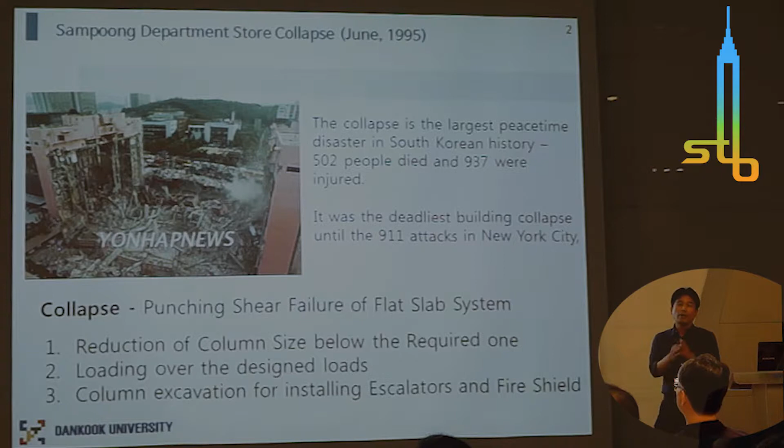The collapse cause was the punching shear failure of the flat slab system. The column size was reduced below the required one. Surprisingly, an architect, without any consult from a structural engineer, decided the reduction of the column size, the loading over the designed loads, and then column excavating for installing escalators and fire shields.

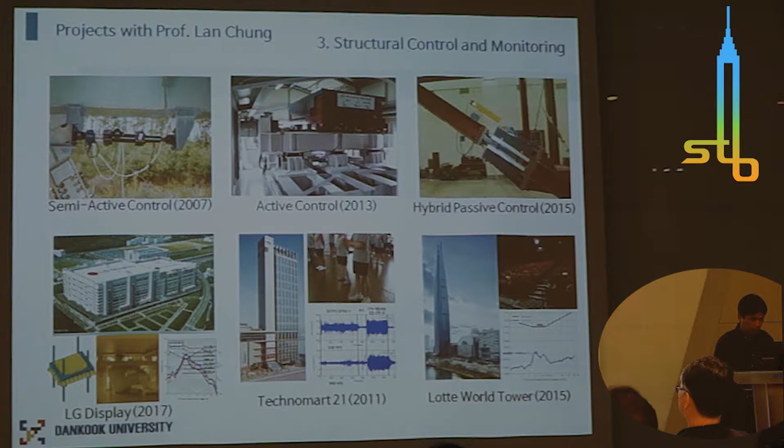First is the active control. Before we started this project, Korea was a wasteland in active control—all the products for active control were imported from Japan. We first developed this prototype of active mass damper and applied it to a 5-story steel structure. We verified the performance; the active damper can significantly reduce the structural response. We also developed control algorithms.

After the success of this prototype damper, we were looking for practical application. Who is going to use our damper? Well, who is willing to use our damper without any practical application track record?

Abnormal vibration at a 39-story building structure was occurring. Mystery shaking at an empty solid building. The 39th floor accelerometer showed vibration for about 10 minutes, with no earthquake in the area.

The building was rocking up and down, and I felt so dizzy that I almost vomited. All the residents evacuated for 3 days.

Everyone, including us, every Korean was shocked, because I think this is due to the trauma from the collapse of the Sampoong department store. A normal building may collapse even in normal time, so Korean people may have trauma about building collapse.

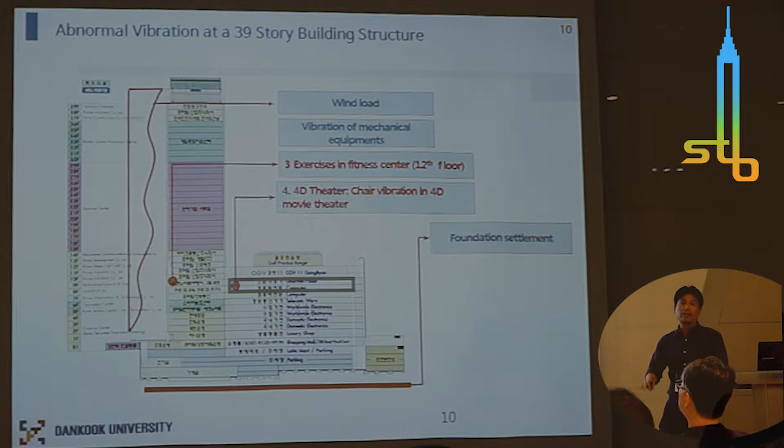But the wind speed that day was so small, and the mechanical equipment operates all day, while the vibration accident only occurred for 10 minutes. Also, the building was mounted on a rock site, so only 2 vibration sources were considered as possible sources.

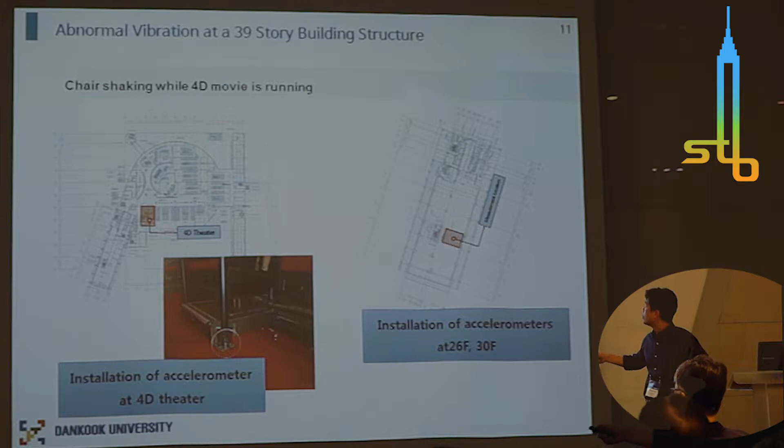The experiment was conducted on the 4D theater, where an accelerometer was installed at the office building. The vibration accident occurred at this office building.

This slide shows the movement of the 4D theater. After the start of the movie, the floor of the 4D theater vibrates significantly, but the office building does not show any response according to the 4D theater's movement, and after it stops, there is no change in the vibration.

Only human-induced vibration can be observed. This room was not occupied by humans.

We constructed an analytical model and found the vertical mode. The frequency of this vertical mode is 2.7 Hertz, which is quite small. So we could estimate that this building can be excited by human activity.

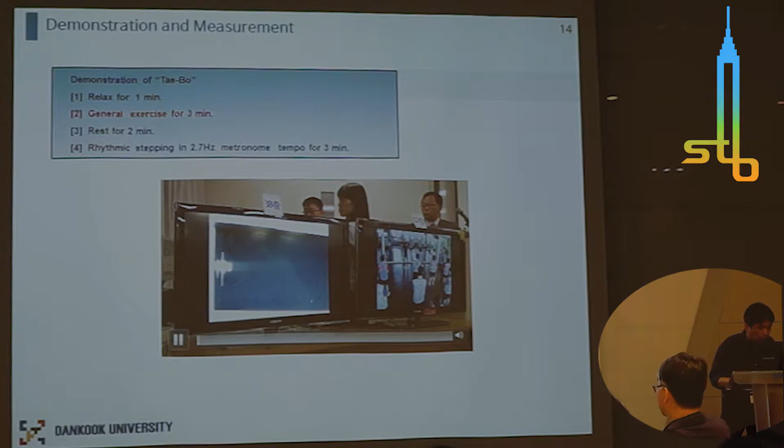I'm going to show the public rehearsal. This movement is on the 12th floor. Here is the acceleration on the 38th floor. This is the general movement.

It's called a mixture of taekwondo and aerobics. In normal time, this does not cause any vibration amplification.

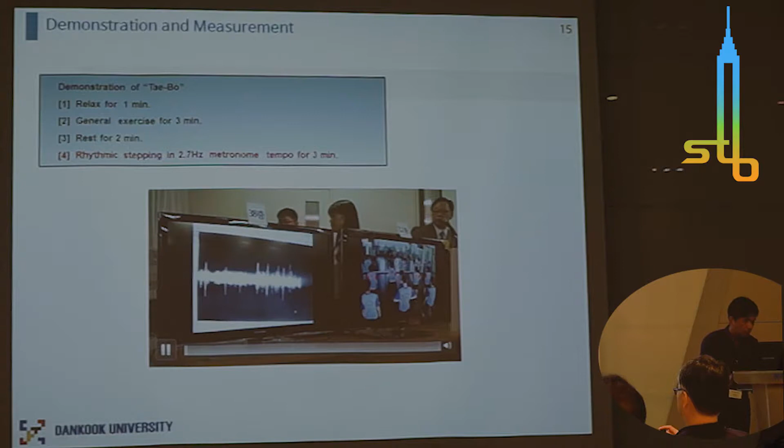However, people are stepping according to the frequency of the building structure. I think you should notice this amplification in the building structure's acceleration.

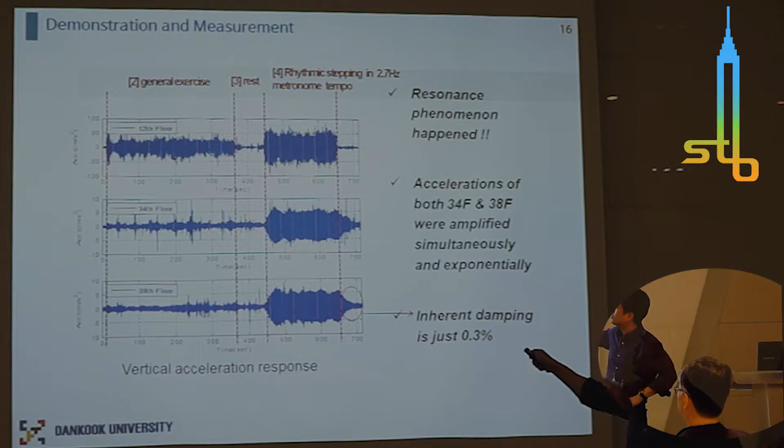We measured the inherent damping by observing the free vibration after the excitation. The inherent damping was just 0.3%, which is too small. It just consists of a steel box column, and vertical movement does not cause any friction between cladding or other elements, so the friction or damping was so small.

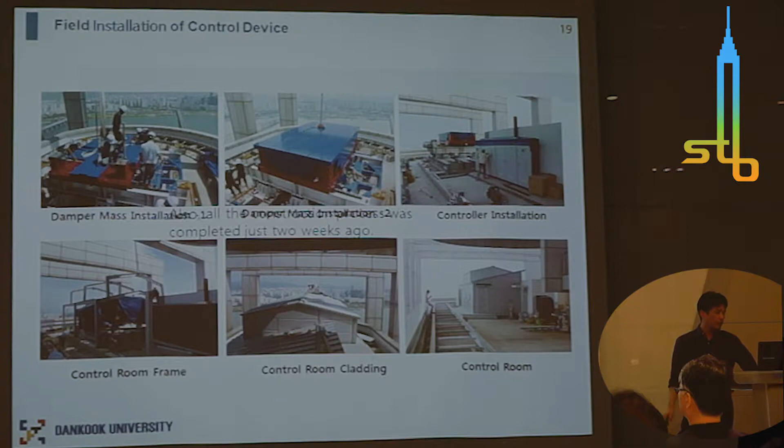We are going to develop this type of damper for controlling both vertical and horizontal directions. This is the process of the construction. The damper was successfully installed, and we conducted the experiment.

Here is the steel plate, which can prevent the movement of the TMD. By installing the steel plate, we could reproduce the resonance phenomenon. Only 10 people can excite the building in the global direction. Here, the red line is the resonance result. You can obtain the same result at that extent.

After removing the steel plate, we could see the TMD impact. You should clearly see the structural response was reduced significantly. The damping increased from 0.3% to 2.7%.

Also, we conducted a wind tunnel test. Although the vibration extent occurred in the vertical direction, the owner of the building worried that another load may excite the building.

The brand of the building was so damaged that the owner of the building could not sell it to another person. He wanted the building to have no vibration extent in any manner.

So we conducted a wind tunnel test. By conducting the wind tunnel test, we found the building is not so vulnerable to wind load.

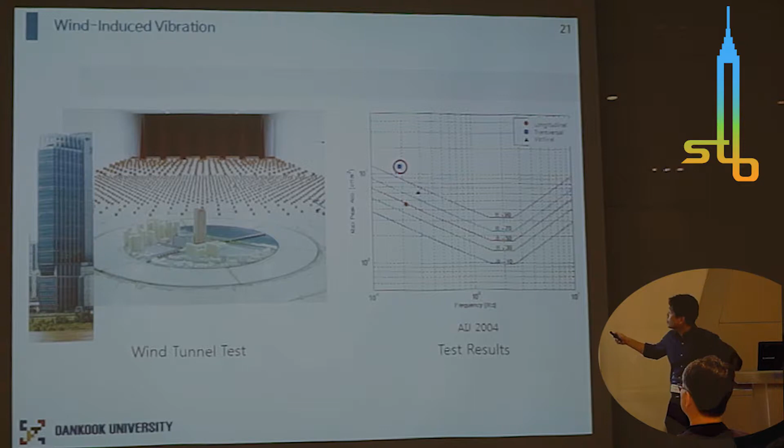Also, there is another limitation: the installation space was so small, and the stroke was very small. Small mass, small stroke is a very hard condition for me. So we developed a stroke minimization control algorithm. Here is the algorithm - we could minimize the stroke.

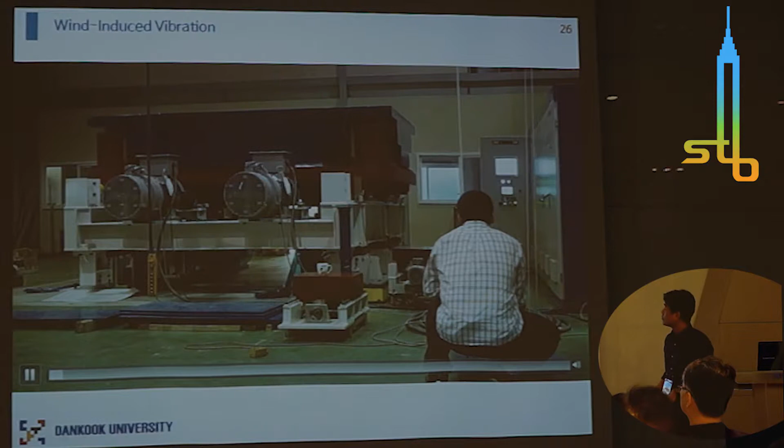This pendulum symbolizes the building movement. Here is me. The active mass damper acts according to the structural movement.

Can you see the wood? If this mass strikes this wood, we will fall off, and then we fail. We designed how large to excite the building pendulum to an extreme level. This mass should not touch this wood.

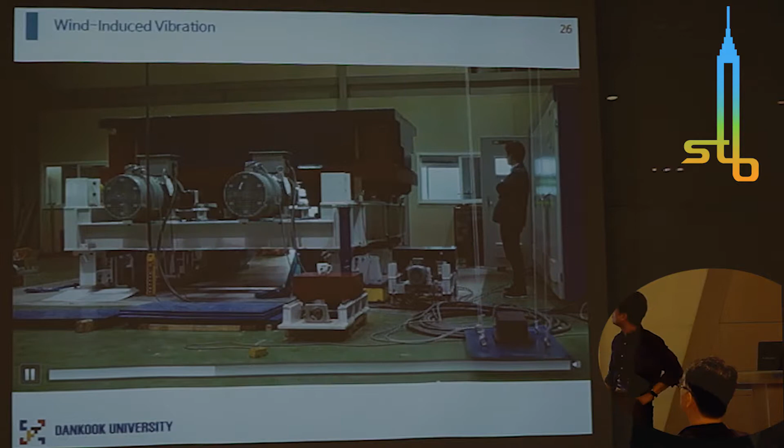After installation of the active mass damper, we conducted a system ID. We could obtain the system identified result. You can see the identified and measured results were almost identical - the system was accurately identified. After installation of the damper, the first, second, and third mode damping ratios increased significantly.

Based on the success of this active mass damper, we could obtain another practical application: the Incheon airport control tower. We conducted a performance test and could estimate the scale of the active mass damper - it's very small.

Here is the pendulum-type structural model, which models the movements of the structure.

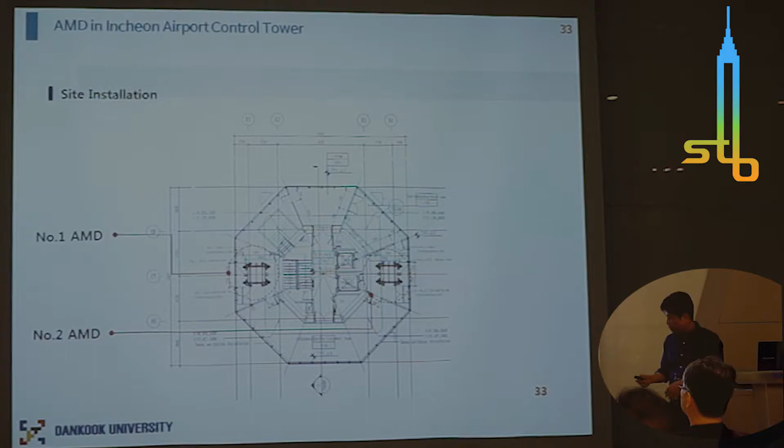The two dampers were installed in Incheon Airport. An in-situ test was conducted. You can clearly see that damping increased significantly by installing the damper. Also, in the y direction, movement could be controlled.

This is another project for passive control: the development of a multi-action hybrid damper for reducing wind and earthquake responses.

This is an LRB, lead rubber bearing, and this is friction. If the slippage of the friction pad does not occur, this movement can be rigid. So before the slippage of the friction pad, all deformation concentrates on the LRB.

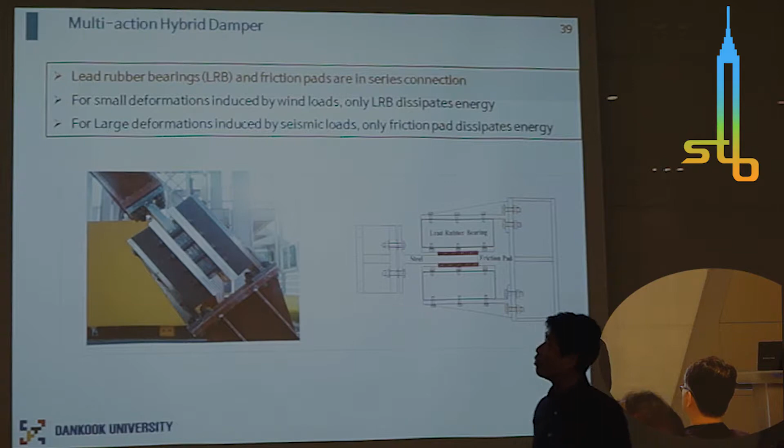For small deformation, it was not enough to excite large deformation. For wind loads, only the LRB dissipates structural energy. For large deformation induced by seismic load, after the slippage of the friction pad, only the friction pad dissipates structural energy. So we developed this passive type control device for controlling both wind and earthquake loads.

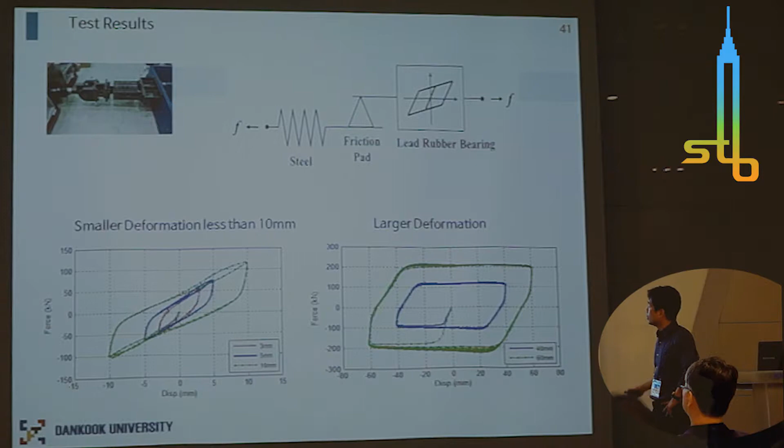A cyclic test was conducted and we could obtain the hysteretic curve using this damper. For small deformation, only the LRB shows the hysteretic curve. For large deformation, it's something like a typical friction damper characteristic.

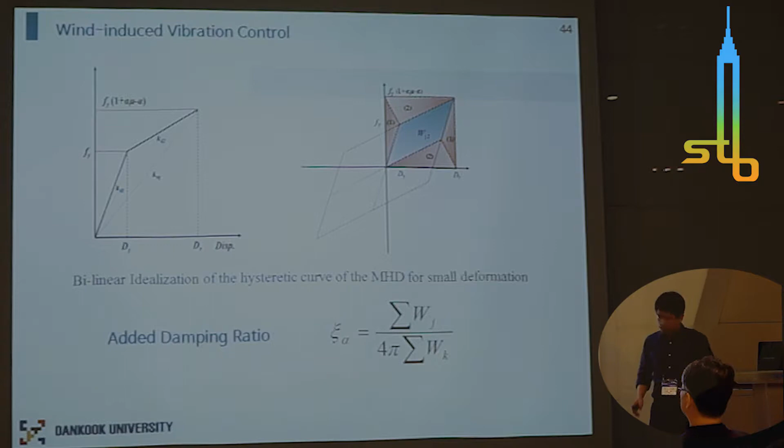We simulated the performance of the damper under wind loads by generating wind load using a wind load spectrum. We could estimate the building response reduction ratio by using the gust factor and equivalent damping ratio. Also, by installing the damper, the increase of the damping ratio was calculated, and we could estimate the wind load reduction factor.

The crossing point was the estimation - just the estimation of the building reduction ratio. It's 0.596. Finally, we simulated the building response using the generated wind load and could obtain the lateral displacement reduction ratio. It's 0.585, almost similar to the estimated one.

Also, we conducted a real-scale building structure test using a 5-story structure by installing the damper at the first floor. The deformation was reduced significantly.

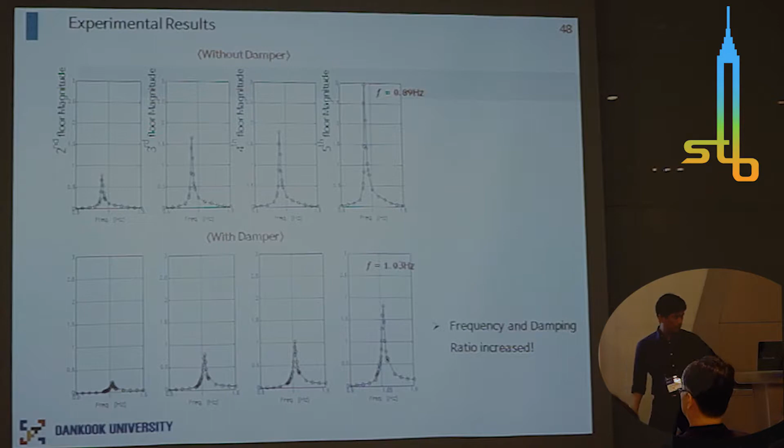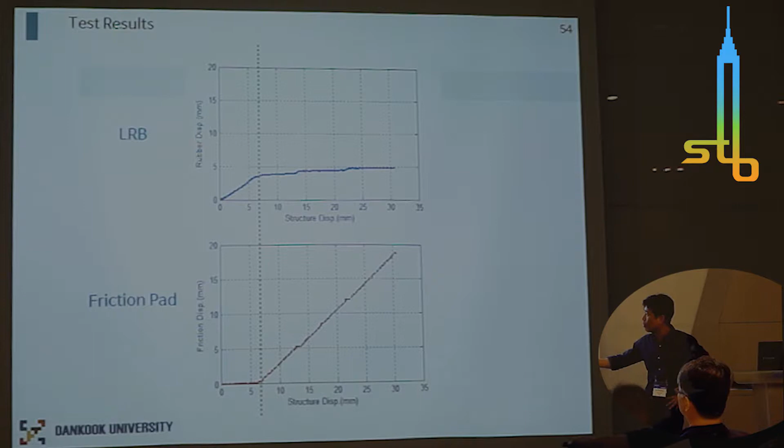So a full-scale one-story building experienced load control testing. We could obtain the increase of the initial stiffness and the hysteresis. For small deformation, when enlarging, the deformation increased, with no movement in the friction pad. After slippage of the friction pad, only the friction pad increased the structural damping or displacement.

I would like to end my presentation with special thanks to Professor Chung. I have conducted all three of these projects with him, so I was happy, and I'm happy now. Thank you.

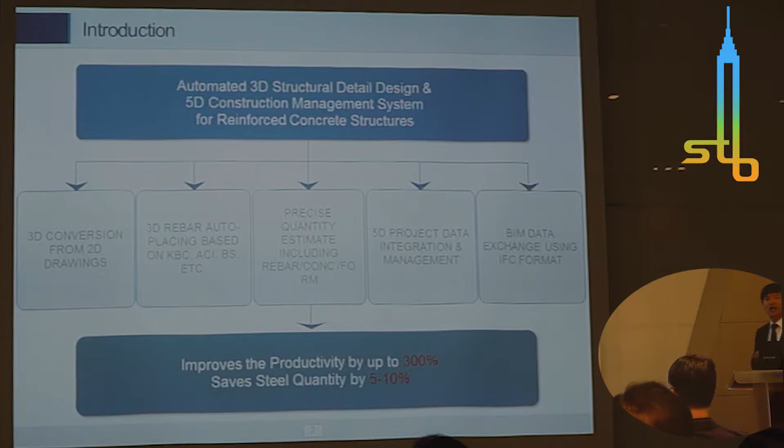Builder Hub provides precise quantity estimation, including rebar, concrete, and formwork. It also provides five-dimensional project data integration and schedule management. 5D means three-dimensional design information plus schedule information as the fourth dimension, and cost information as the fifth. Builder Hub also provides data exchange functions with commercial BIM software such as Autodesk Revit or Tekla.

The first core technology of Builder Hub is auto-recognizing 2D drawings to generate a 3D BIM model. Let's watch a short movie.

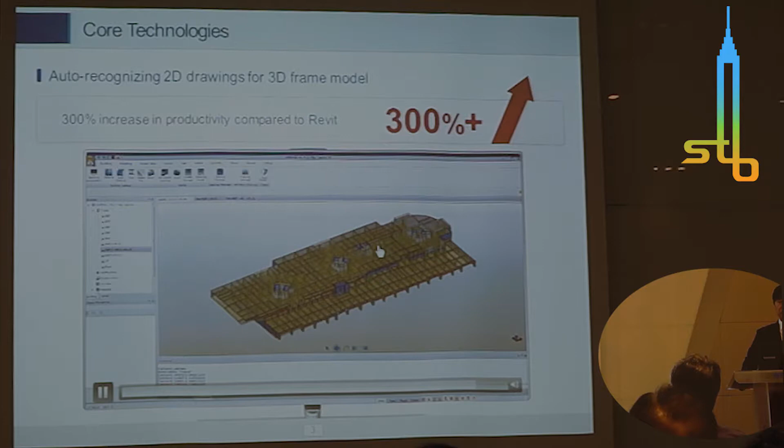Builder Hub reads the 2D drawings, selects a beam layer from AutoCAD 2D drawings, reads the drawing, and generates a 3D object like a beam. The next step reads the floor slab, and you can see the slabs generated automatically by recognizing the 2D drawings. Throughout this process, you can finish the basement structure and the tower structure. Using this function, productivity for 3D BIM modeling can be increased up to 300% compared with commercial BIM software.

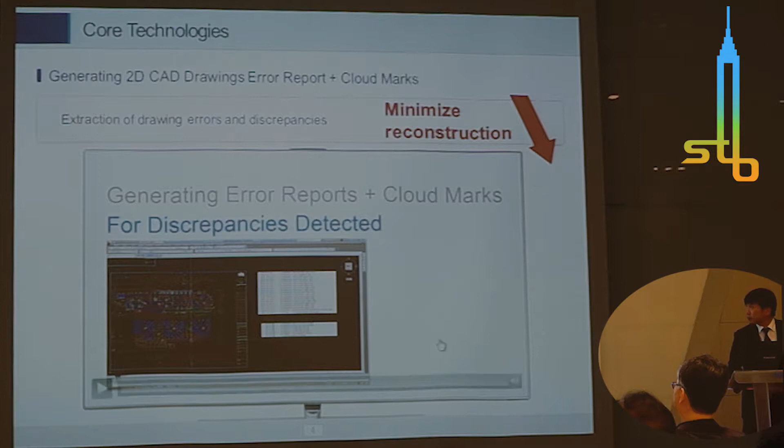The next function of Builder Hub is generating a 2D drawing error report and cloud marks during recognition of 2D drawings. Builder Hub produces an error report like this, exports it to Excel, and adds cloud marks to the original 2D drawings. This report and drawings are sent back to the design office to request redesign and fix errors. Through this process, we can minimize the possibility of reconstruction during the actual construction phase.

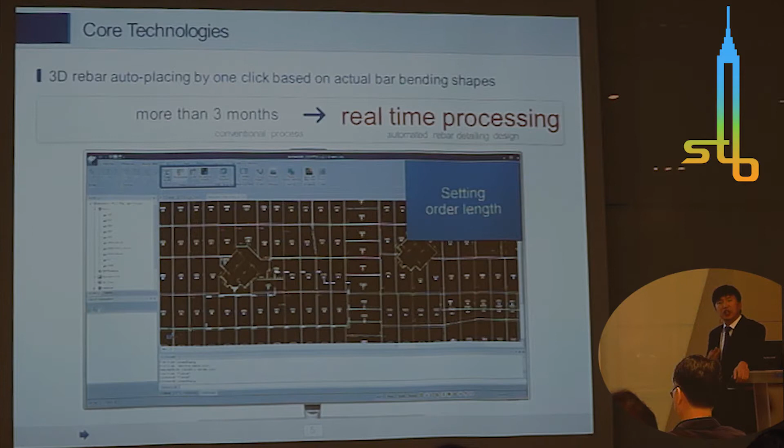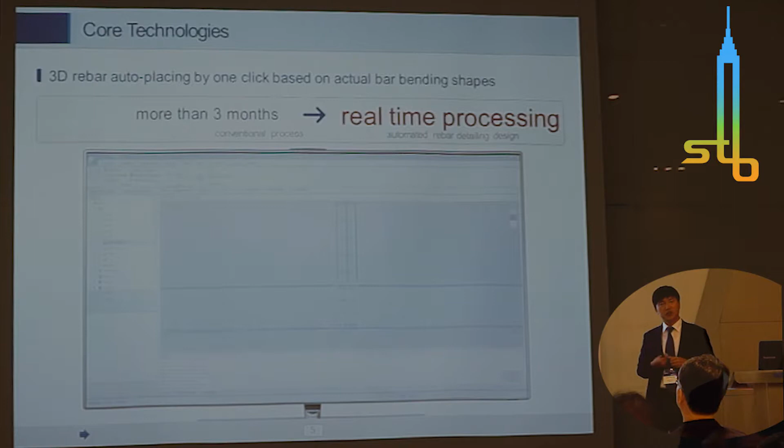The next function is extracting rebar shop drawings. Usually there are more than 1,000 drawings, and it takes several months to finish such shop drawings for rebar work. But after finishing the 3D BIM model, rebar shop drawings can be extracted automatically according to the construction phase at the site. This drawing process for more than 1,000 drawings is very time-consuming, tedious, and error-prone, but by automatic extraction from the 3D BIM model we can reduce the possibility of drawing errors to one-tenth compared to the traditional process.

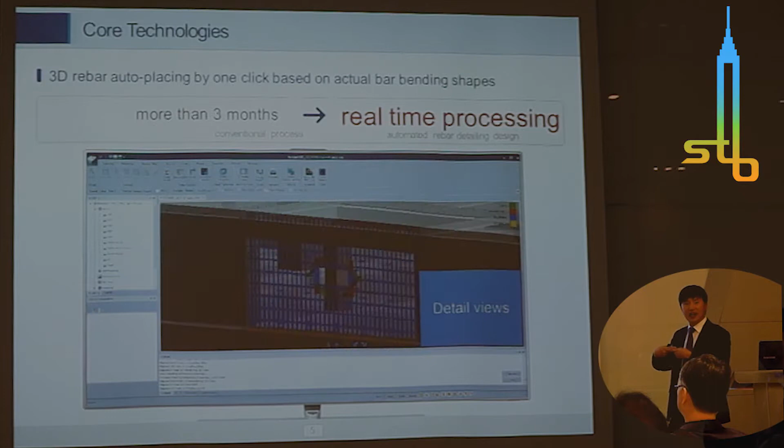I'm sorry, so let me complete this. This is the process to produce the three-dimensional rebar bar bending schedule automatically, setting design options, rebar detail shape and length, including splice and anchorage, which can all be generated automatically.

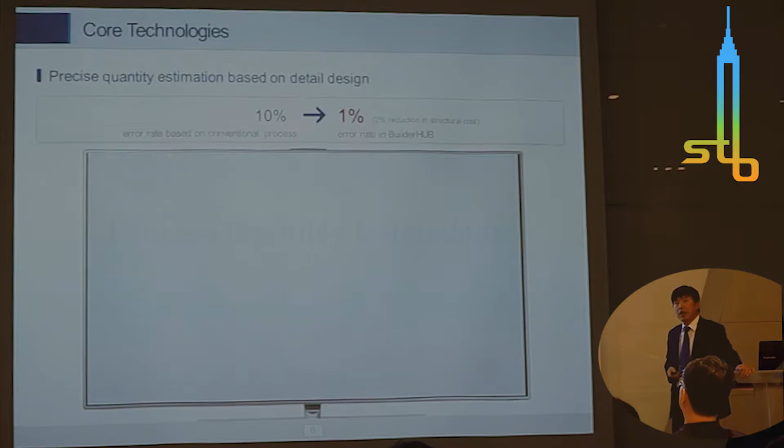Based on the three-dimensional model, we can get very precise structural quantities with just one click, including rebar, concrete, and formwork. It is very difficult to get precise quantities for rebar because it is complex to include splice design and anchorage design for rebar detail; usually the error ratio for rebar quantity reaches 10%. But with automatic calculation of rebar quantity from the three-dimensional model, we can reduce the error ratio down to 1%.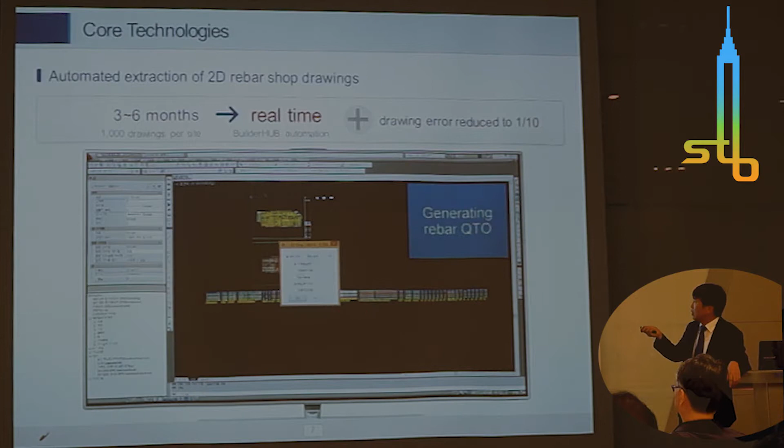As I explained just before, this process produces rebar shop drawings, 2D shop drawings used to construct rebar work. It reads this part and generates rebar shop drawings and bar bending schedules to send to the rebar factory.

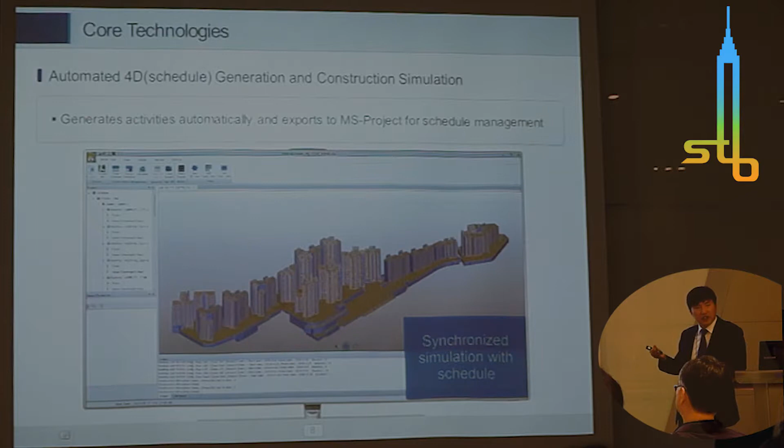BuilderHUB has a function to generate rebar activities and export this information to commercial schedule management software such as Microsoft Project or Primavera. After that, field engineers can arrange the actual schedule according to site management. Then BuilderHUB gets back the schedule information, and construction schedule management or cost management can be done according to the construction schedule.

The next core technology is excellent interoperability with other commercial tools. This example will illustrate how to export the structural model to Revit, including rebar information like this. This model shows the BuilderHUB model, and this model shows the Revit model.

This slide shows the rebar process based on BuilderHUB. After 2D CAD drawings, design drawing, or 3D BIM model is given to BuilderHUB users, BuilderHUB then produces 5-dimensional structural information, including 3D frame shapes, rebar placement, rebar, concrete and formwork quantity, and construction schedule.

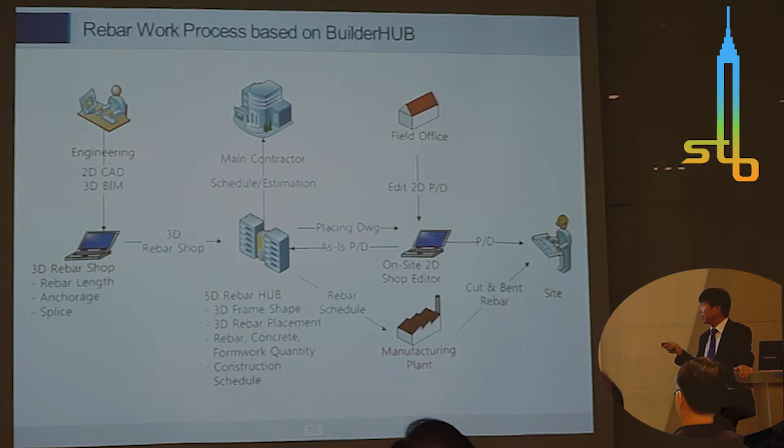This information can be used by the main contractor for schedule and estimation review, and the 2D shop drawings can be extracted automatically from this model. The rebar schedule will be sent to the manufacturing plant to make actual rebar shapes, and the field office reviews the 2D shop drawings extracted from the model and makes small changes. The actual construction work can then be done based on the placing drawing and cut and bent rebar from rebar factories.

From now, I will show you some practical effects of BuilderHUB throughout actual site practice. This slide shows discrepancy and missing information in 2D drawings, which are automatically detected throughout the recognition of the drawings.

The same one has different information between the drawings, and these kinds of error information are listed like this and exported to an Excel spreadsheet or other software such as Navisworks, a very famous software to simulate a construction site, produced by Autodesk.

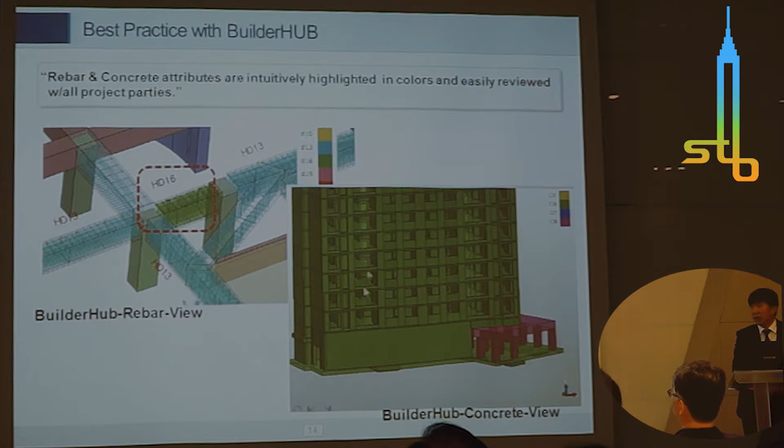We can use the BuilderHUB model as a value engineering tool. We can try several kinds of rebar detail, like this one or this one. Just select after making a model, this alternative and this alternative, and we can compare the total amount roughly, because BuilderHUB produces accurate quantity automatically. Using this automatic quantity calculation function, we can compare many kinds of alternatives and details, and choose the best one.

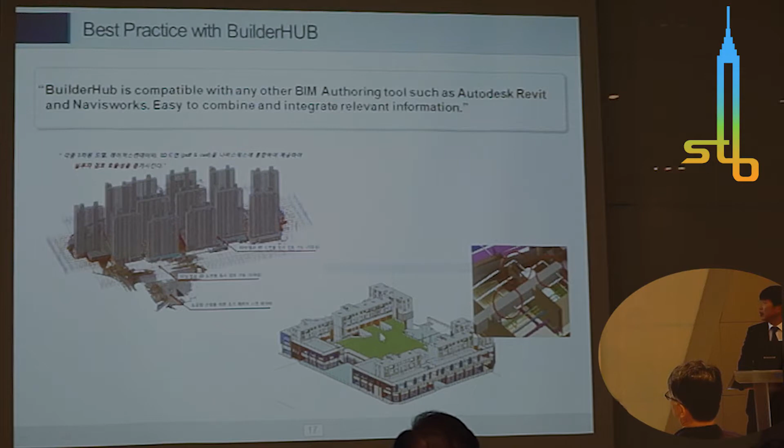This slide shows the accurate quantity information exported to a spreadsheet like Excel, and interoperability with commercial authoring tools like Navisworks or Revit.

Nowadays, BuilderHUB is widely used in Korea by construction companies and estimation companies, and many such companies review and check the productivity and accuracy of BuilderHUB products. Throughout this review process, we find that the productivity to build a three-dimensional BIM model can be increased by 3 times compared to 3D commercial BIM tools such as Revit. And the total cost of rebar can be reduced by 5 to 10% through automated and efficient design and management, with quality and real-time feedback like this.

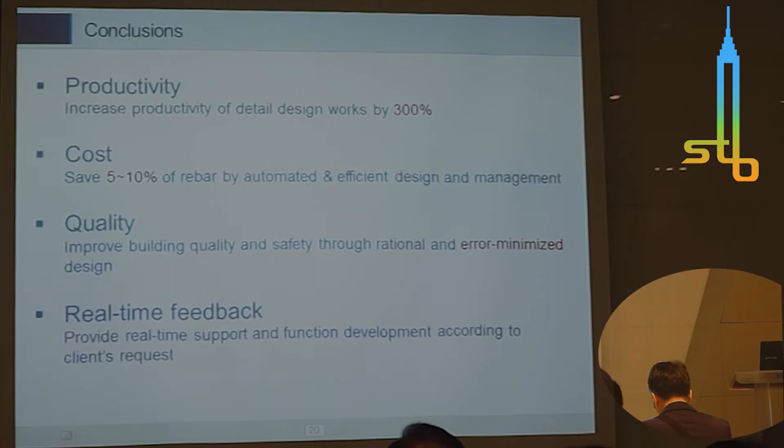Okay, my name is Dongmin and I'm a PhD student at Korea University. Actually, the subject is a little bit different from what I suggested earlier.

So today we're going to talk about advanced lifting technologies and formwork systems for tower construction. I'm honored to be with you today at this great ceremony, retirement ceremony, and this special session.

Let me start it. Yes. Yeah, okay, thank you.

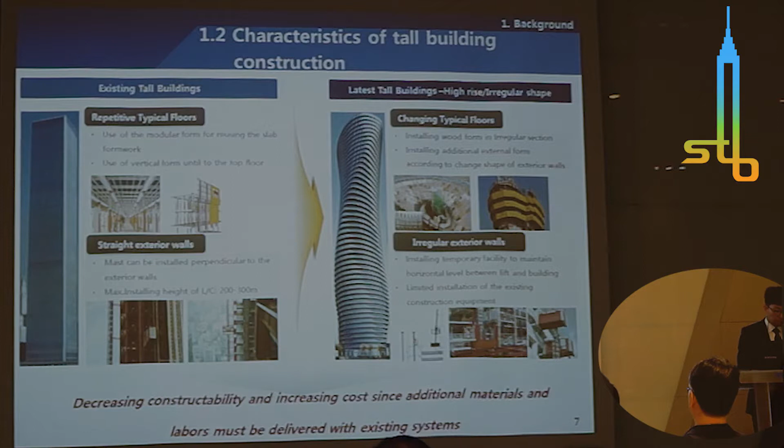Actually, tall buildings are characterized by their high energy consumption compared to other building types, since they rely intensively on their HVAC systems due to the extreme weather conditions associated with increase in height.

But they also have an opportunity for energy savings. In recent years, maybe it has been noticed that many software tools, something like parametric modeling or 3D visualization tools, allow us to design energy-saving buildings or tall buildings.

Even in Korea, nuclear power plants are diminishing as years go on, so in the future, maybe zero energy tall buildings will be a significant research area, I think.

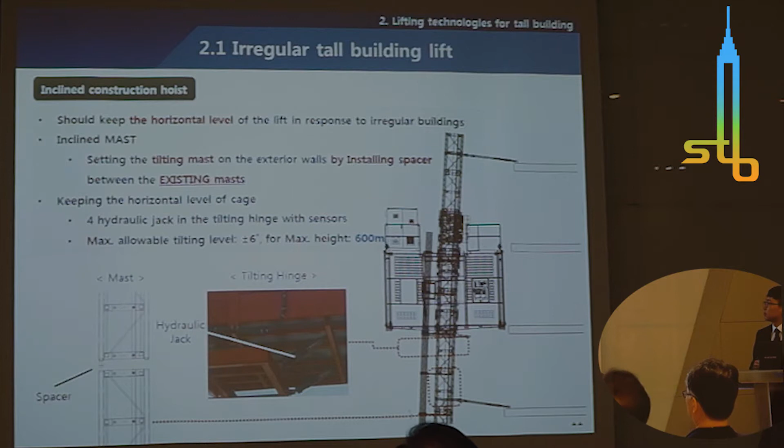So firstly, we developed the inclined construction hoist. One of our purposes was to keep the horizontal level of the lift in response to irregular buildings. We are setting tilting masts on the exterior walls by installing spacers between the existing masts. To keep the horizontal level of the cage, we used 4 hydraulic jacks in the tilting hinge with sensors. The maximum allowable tilt level was customized to 6 degrees for maximum height of 600 meters.

This picture shows the inclined hoist, so you can see the inclined points in the mast. In terms of operating cost, the technology reduced material cost of temporary platforms by approximately 26%. And in transportation time, about 28.8% efficiency is increased by reducing transfer and horizontal movement.

The next one is the lift power rail system. The power cable system has many problems with twisting and breaking of the cable. Even high tension cables have a possibility of cutting problems in buildings over 300 meters. Once the cable is broken, it causes very big disadvantages and cost damages, so we have to solve that problem.

The lift power supply system is a method of supplying power by contacting a conductor housing face to the mast. The most significant advantage of this technology is that we can apply it to any building higher than 550 meters. It also doesn't require any cable system, so we can get rid of any accidents caused by cables.

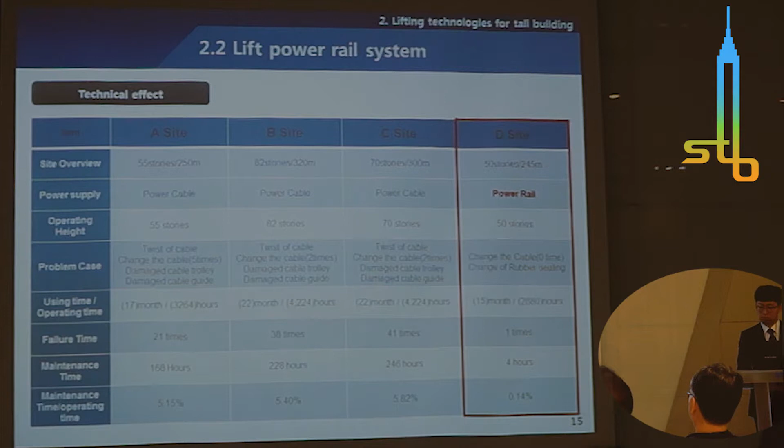The third one is the formwork system for super-tall buildings. So how can we respond to the facades and irregular floors? We approached this with three topics: vertical form for concrete facade, horizontal form for concrete floor, and lifting technology for formwork.

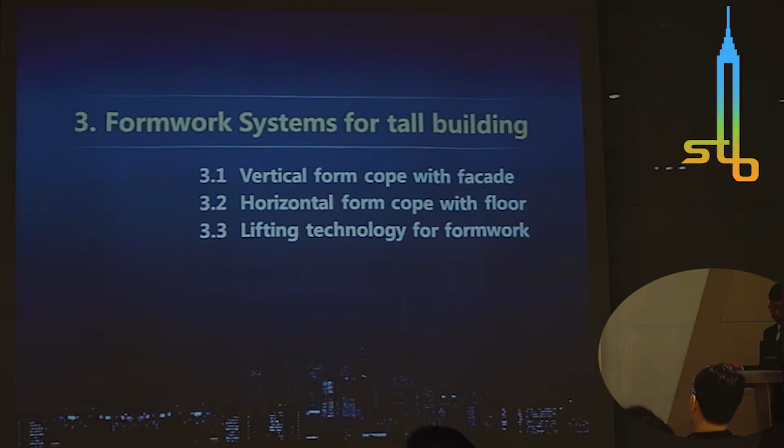A previous vertical form for super-tall buildings has three components: profile, shoe, and anchor. But it is hard to apply the vertical form to an inclined structure since the anchor and shoe are fixed, and the profile is limited to vertical movement.

So this technology could be applied to any regular shaped buildings, but there are limitations when we apply this technology to irregularly shaped buildings. So we newly developed an anchor extension unit. The anchor can cope with the vertical distance using the extension unit, so it could be applied to the setback area, and we also improved the profile angle.

The profile angle can be adjusted about plus or minus 7 degrees vertically, so it can be applied to steadily inclined areas. Also, the shoe is improved to be able to rotate to cope with twisted structures. These technologies are now widely applied practically in construction sites.

The next one is the horizontal form, concrete floor. This is a sky deck, and this is a flying table. This kind of modularized formwork is widely used in super-tall building construction to increase the productivity of formwork. But formwork productivity is decreased since much cost and labor are required to install conventional non-modular forms in irregular shaped areas.

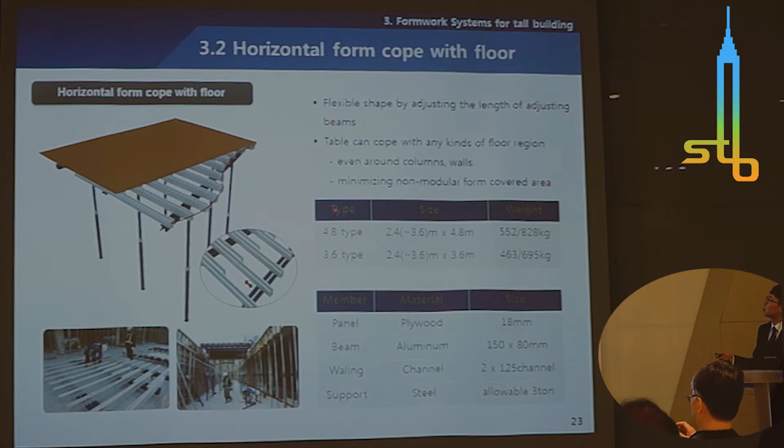That's why we developed a horizontal form called the flexible table form. It achieves a flexible shape by adjusting the length of the adjusting beams. These are the adjusting beams. They can cope with any kind of floor region, even around columns and walls, so we can minimize the non-modular form coverage area.

That's why we developed the Automated Lifting System. This ALS is integrated with construction hoist and uses the hoist and mast together. By using this technology, we can improve the productivity and safety of formwork lifting because we don't have to use any tower cranes or other temporary facilities.

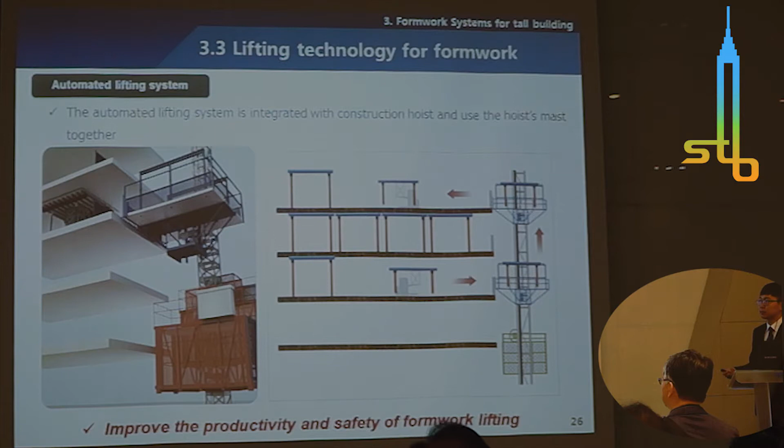This is a simulation research comparing two methods: the tower crane method and the automated lifting system. As a result, we verified almost 42% improvement in productivity, and also 36% of tower crane operating time was reduced. In the construction process, the tower crane does many different work tasks, so if we can reduce its operating time, it can be used for other more important tasks, allowing us to reduce construction time or cost more efficiently.

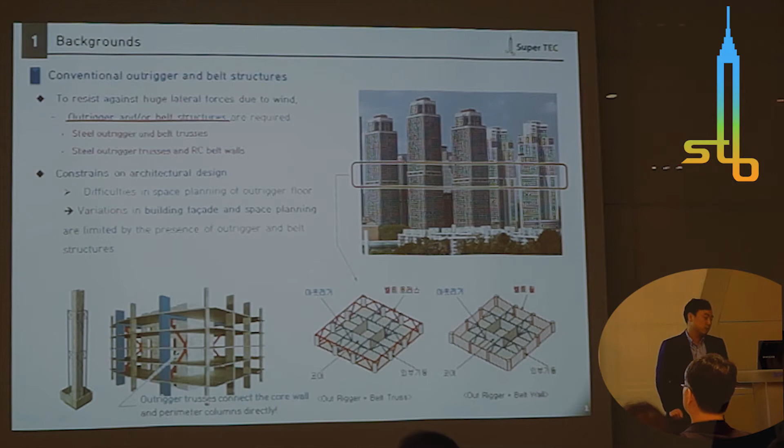There is another difficulty of conventional outrigger and belt structures in structural detailing and construction. As you know, these structures should carry huge significant forces, meaning we have to make massive outrigger and belt structures with steel or steel-concrete materials rather than concrete. However, core walls are usually constructed with concrete, meaning that in the construction of tall buildings there will be interference between two different construction methods, such as core wall concrete construction and steel outrigger construction.

This mixed use of different construction methods can cause huge construction delay or cost increase. At the same time, we have to think about the structural detailing and connection between the concrete core and steel outriggers. The detailing is very complicated because there is a huge force transfer in this connection.

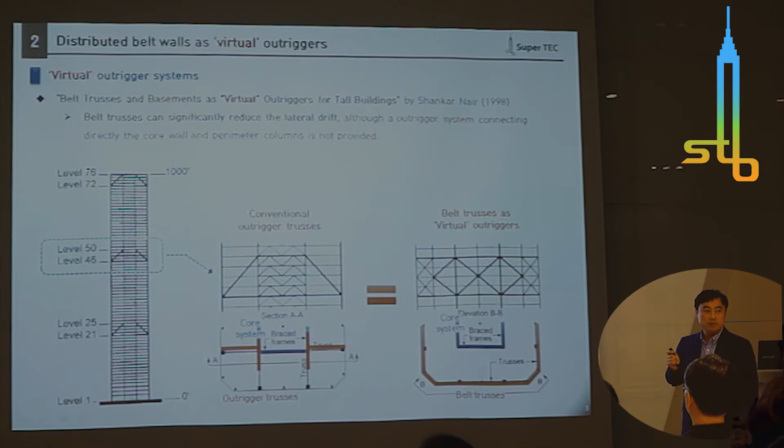Nair later named this the virtual outrigger effect.

In this study, I went further with the concept. As I said in the previous slides, there is interference between two different construction methods in high-rise buildings. So I replaced the conventional steel belt trusses with concrete belt walls. Basically, the basic behavior of this concrete belt wall is the same as that of the steel belt trusses. As presented here, by using concrete belt walls, we can expect some structural advantages.

At first, I thought that I have to place the belt walls at a couple of floors, as you can see here, in the middle stories and top floors. But if this kind of concentrated belt walls work well, why not distribute these belt walls around the perimeter of the plan and along the building height?

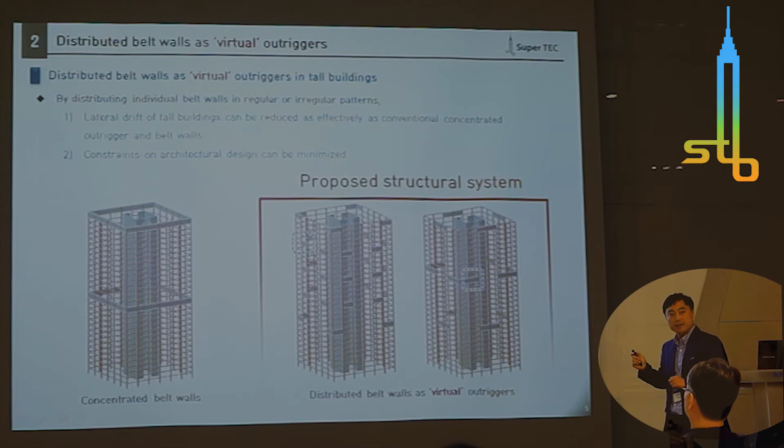So this is my new alternative, my alternative structural system for high-rise buildings. I made it distributed belt walls, as you can see here.

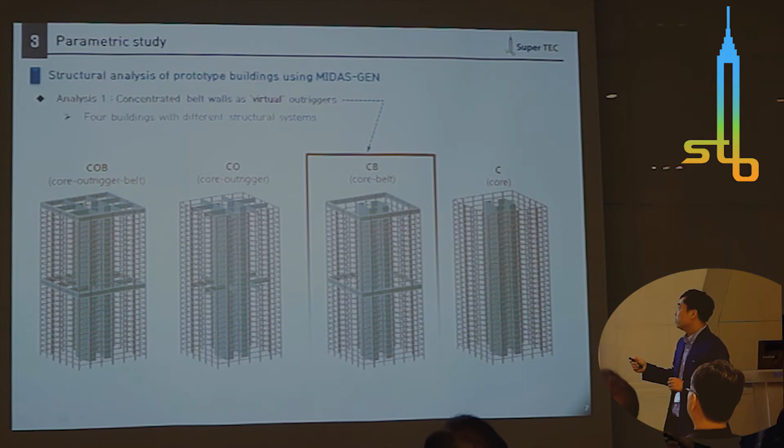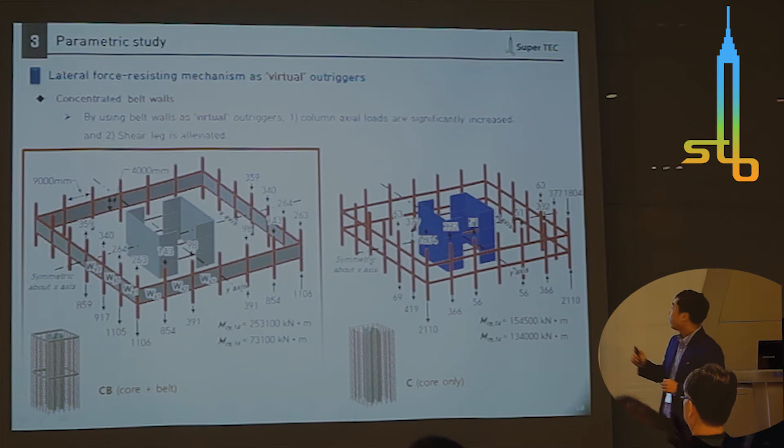Take a look at these column axial forces. At the corner, you can see very large column forces. Along the side, the column forces are significantly reduced. It means that in this system there will be significant shear lag, so this system is not effective in resisting lateral forces.

On the other hand, on the left, you can see the proposed concentrated belt system. If you look at the column forces around the perimeter, the variation between the column forces was significantly reduced, and the overall magnitude of column axial loads was significantly increased. This clearly shows that the proposed concentrated belt walls are very effective in resisting lateral forces, and these belt walls truly share the lateral force resistance with the core walls, even though they were not completely connected to the core.

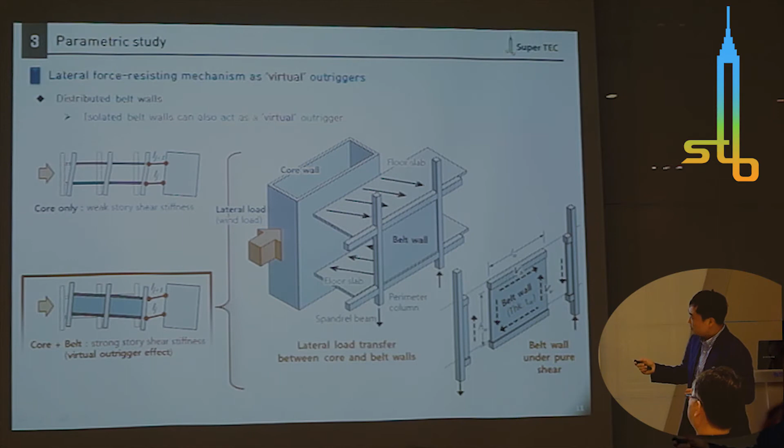The same phenomenon can be found in the system of distributed belt walls. As you can see in this diagram, this is a core, and these frames are the perimeter frames. If this core deforms laterally, since the lateral story shear stiffness is very small because this is empty, we cannot expect any significant contribution of these perimeter columns to the lateral stiffness.

However, in this system, if there are belt walls between vertical columns, and this core wall deforms laterally like this, we easily understand from this diagram that there will be a downward force in this column. On the other hand, there is an uplifting force in this column.

It means, as you can see here, there will be a significant shear force acting vertically on these belt walls, and these belt wall forces are definitely the counterpart force of the column axial force induced by this mechanism. These belt wall forces were transferred through the top and bottom floors from this core.

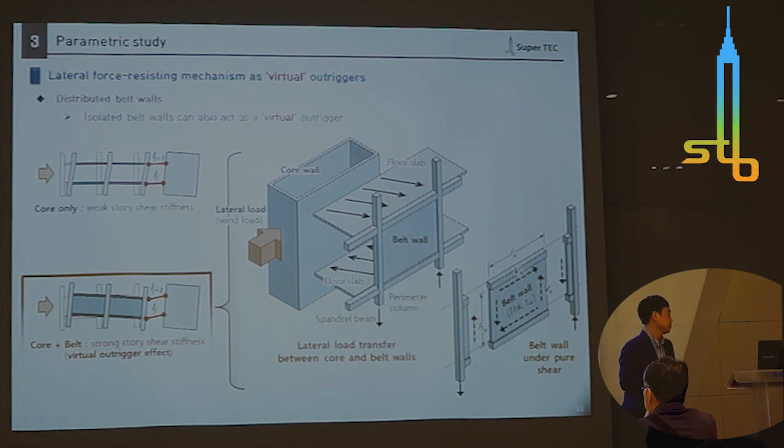So far, I have shown that the proposed concentrated or distributed belt wall systems are very effective in resisting lateral forces. And from this, I'm going to talk about how to design these kinds of belt walls.

As I said in the previous slide, these belt walls will be subjected to huge shear forces, and this force is pure shear. In this case, the belt wall will be subjected to diagonal shear cracking.

You may think that if this wall is reinforced by horizontal and vertical reinforcing bars, the resistance against shear cracking will be very high, but that's not true. Actually, we have to think about the magnitude of these shear forces, and these shear forces are beyond our expectation.

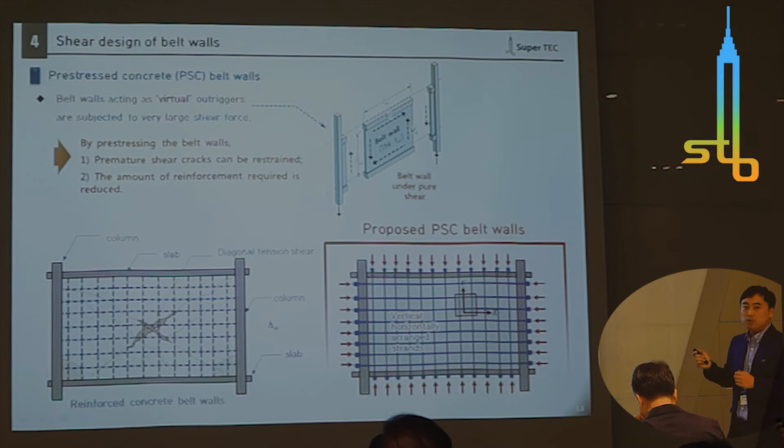I think, and I propose the new reinforcement method for the belt walls. As you can see here, I'm going to use prestressed belt walls for this system.

By prestressing the strands placed horizontally and vertically, I think the resistance of concrete against shear cracking can be significantly increased.

For the design of such prestressed belt walls, we have to think about two issues first. The first issue is the load condition of these belt walls. Actually, this belt wall, as you can see, is subjected to shear.

And second, we have to think about the mismatch of two different material strengths.

Actually, if we use prestressing strands, the yield strength of the prestressing strand is often more than 1860 megapascals. However, the compressive strength of the concrete used for the belt wall is usually less than 50 megapascals.

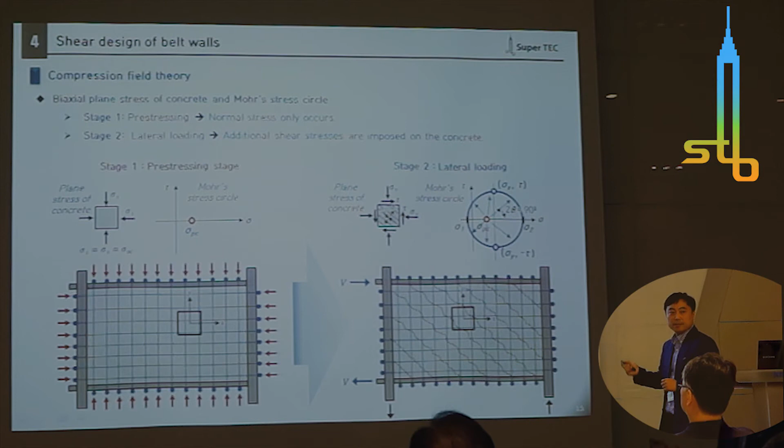In this study, I developed two strength equations for the prestressed belt walls by using the compression field theory. This slide shows the biaxial stresses of concrete and the uniaxial stresses of strands. Actually, the basic concept and the detailed formulation is very difficult, so I'm going to skip it.

Okay, this is the stress states of concrete and the prestressing strand at the stage of prestressing. And this slide shows the behavior of prestressed belt walls under lateral forces.

In this formulation, I postulated two strength criteria. The first one is cracking of concrete, and the second one is yielding of the prestressing strand.

This is the first strength equation for the belt walls. This is the cracking strength. As you can see here, the cracking strength of the belt wall is a function of the amount of prestressing strand and the magnitude of prestress.

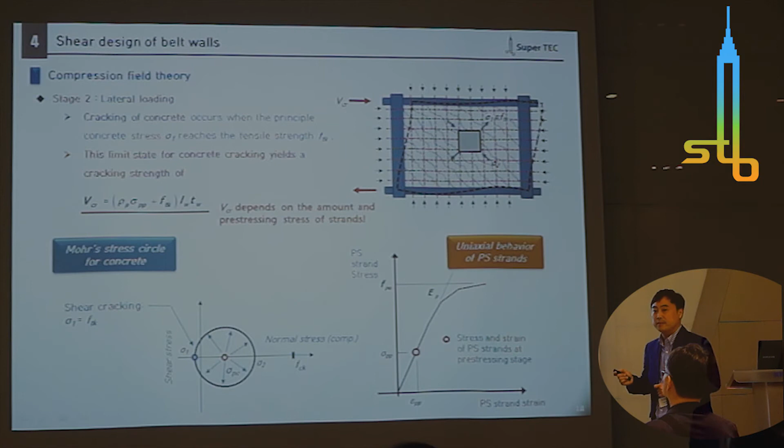This is the yield strength of belt walls, and this yield strength of the belt wall is a function of the amount of prestressing strand.

Okay, this is the last part of my presentation. So far I developed two strength equations for the prestressed belt walls, and in this part I'm going to verify these two strength equations against test results.

And for the verification, I conducted a nonlinear analysis for the prestressed belt walls. For the nonlinear analysis, I used the two-dimensional finite element analysis program called VecTor2.

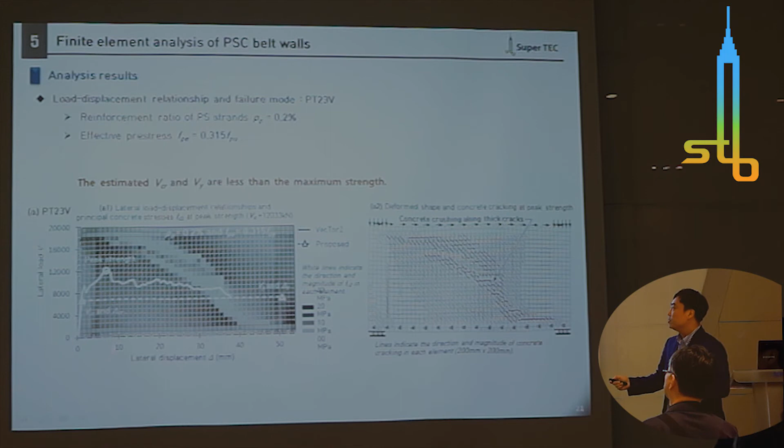This is the result, and on the left, this is the lateral force and displacement relationship. The horizontal axis is the lateral displacement of the belt wall, and the vertical axis is the lateral force acting on the belt wall. The white solid line is the results of VecTor2 analysis, and the dashed line indicates the strength proposed in this study.

As you can see, the proposed strength equations for cracking strength and yield strength are far below the analysis results. What is interesting is that up to the cracking point, the overall behavior is very similar to the results of the VecTor2 analysis.

This is the result of the belt wall subjected to a greater prestress, and the same results can be found on the left figure. On the right, you can see the basic cracking and failure aspects of these belt walls.

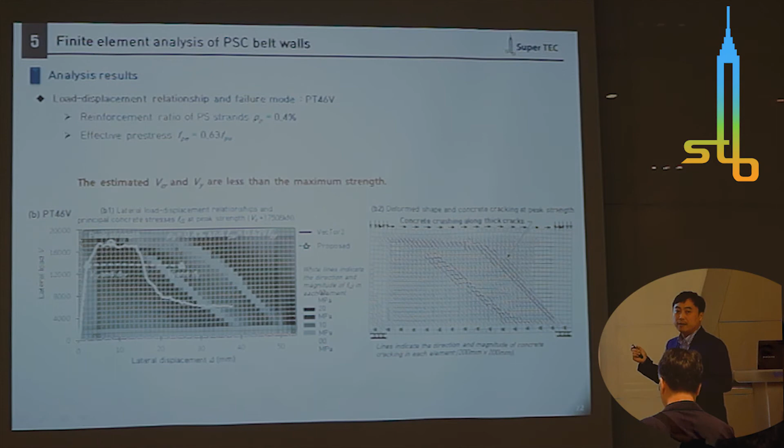Okay, this is a very complicated story, so I'm going to skip it.

It's time to conclude my presentation. In this study, I proposed an alternative structural system for tall buildings, and through parametric studies, I have shown the structural performance of the proposed system. By using compression field theory, I proposed two strength equations for the belt walls, so that we can design this kind of belt wall conservatively. Finally, I verified the proposed strength equations using well-known nonlinear finite element analysis methods. Thank you.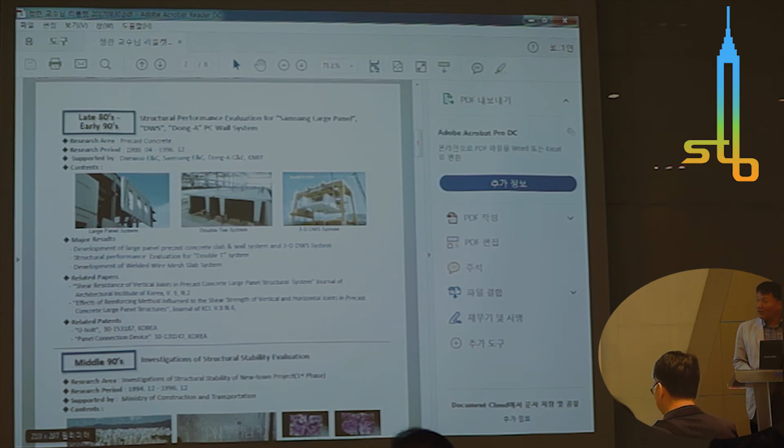From the late 80s to early 90s, he researched precast concrete. Through this research, the Samsung Daewoo Donga large panel system was developed. At the time, many social problems arose from a lack of housing. Through this research, it was possible to supply so much housing.

In the mid-1990s, he conducted two parts of research on investigation and structural stability evaluation. One was the investigation of a new town, including 1,255 apartments and 355 parking lot buildings. Another was the Sampoong department store collapse accident.

This accident was the biggest since the nation's founding. He focused on the accident, examining reduced column size and punching shear of the lateral system.

In the late 1990s, he was studying corrosion and non-destructive inspection in concrete structures. Through this research, he suggested a new equation for the bond strength of reinforcing bars.

In the early 2000s, his research focus was seismic performance evaluation and retrofitting methods for aged apartments. Seismic design codes were enacted in 1988, so buildings designed before 1988 have no seismic capacity. His research was related to developing seismic retrofitting techniques for aged housing. His lab was designated a National Research Laboratory by the Ministry of Science and Technology.

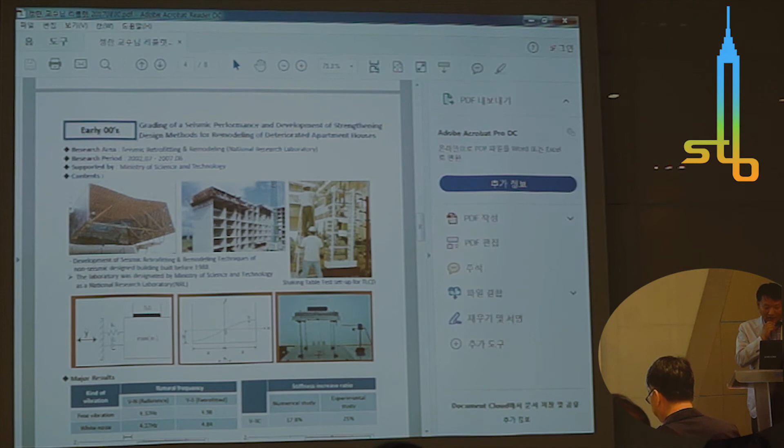In the late 2000s, he studied how to improve the performance of aged apartments, especially focusing on structural performance and seismic performance improvement. During 2011, his research concentrated on ultra high-rise buildings. This research would be better explained by him directly.

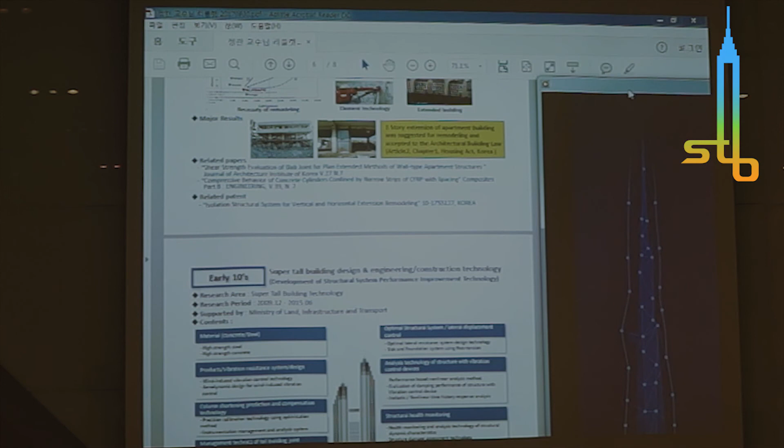The Super Tall Building Global R&D Center was launched with support from the Ministry of Land, Infrastructure and Transport since December 2015, for developing super tall building core technologies for megacities that are consistently increasing. Constructing the infrastructure to support hidden champions that can create novel growth power in the construction field and extending the global share of development technologies. In this video, two years of effort to establish the center will be introduced, demonstrating the establishment of the Super Tall Building Center and the outcome of development technologies.

The university is the research managing department of the Super Tall Building Center, organized by Professor Chung, consisting of approximately 25 senior researchers from industry, universities, and institutes. The total research period is 5 years, from December 2015 to December 2020, with a total R&D budget of approximately 23.6 billion won, of which 20.2 billion won was supported by the government.

The Super Tall Building Global R&D Center has 4 projects. Project 1 was executed by Korea University to develop business support type core technologies for super tall buildings. Project 4 was led by the Research Managing Department, Dankook University, to develop a model for establishing the infrastructure of global support for super tall buildings. Projects 2 and 3 will start in 2018: Project 2 will develop overseas advancement type core technologies, and Project 3 will develop creative innovation type commercialization technologies for super tall buildings.

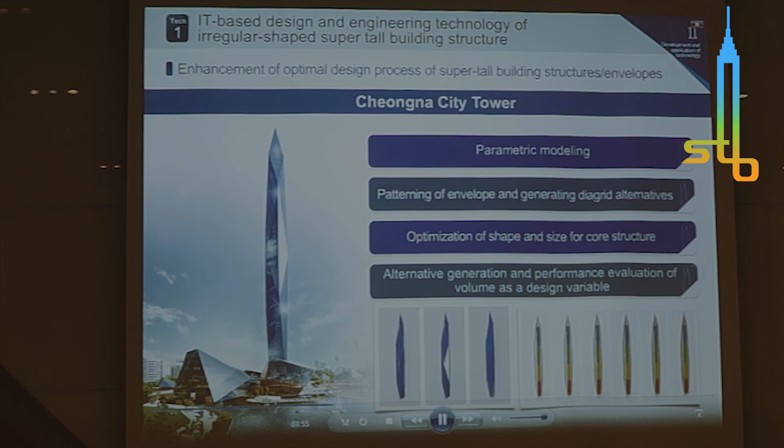Productivity of detailed design was significantly increased by developing a module that can automatically design 3D frame and rebar. Using these technologies, feasibility of construction could be inspected and precise quantity of rebar, concrete, and cast calculated in real time. These technologies were manufactured as a single platform called Builder Hub. Field application and verification of the product was executed by major contractors including Daelim Construction, GS Construction, and Daewoo Construction, and a pilot project with LH is also in the process of field application at the site.

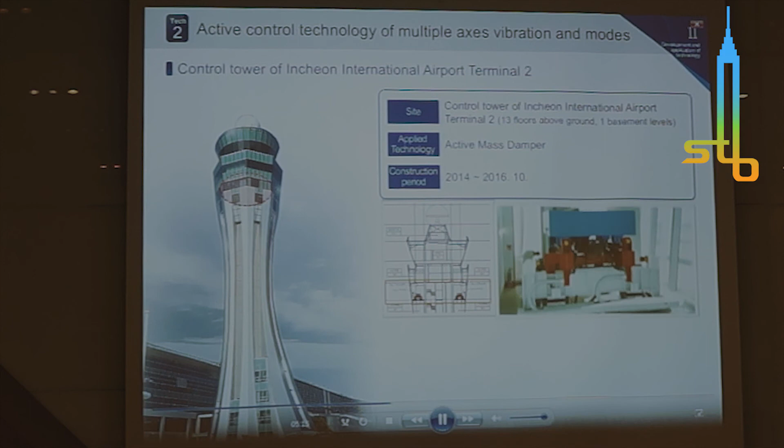Furthermore, the excellence of the developed technologies is recognized, and the active mass damper is applied in the control tower of Incheon International Airport Terminal 2, where 2 active dampers with multiple axes and modes are currently installed. Active mass damper is a domestic unique technology that is also recognized internationally.

The manual control device was actively provided for global services. 2 45-ton TMD and 4 4-ton TMD will be installed on Dubai Eye, the world's highest Ferris wheel. Also, our technology competed against the outstanding company RWDI, which installed TMD in Taipei World Financial Center, and won the contract to install 150 TMD in Treasure Garden.

With technology recognition from Dubai Eye, 2 33-ton tuned mass dampers will be installed in New York Wheel, located on Staten Island near Manhattan. Currently, performance of the vibration control device was examined and the device is released for installation.

This is a construction method of table formwork and lifting technologies. Previously, table formwork was typically operated based on experience and dependent on manpower, limiting productivity without a construction method model. In order to improve productivity, an algorithm that searches for the optimized operation method was developed with simulation, enabling field-oriented and optimized table formwork to be applied.

The research development team compared the total operation method and partial operation method of traditional method and algorithm on a super tall building in Malaysia. As a result, 45% of the operation period could be reduced.

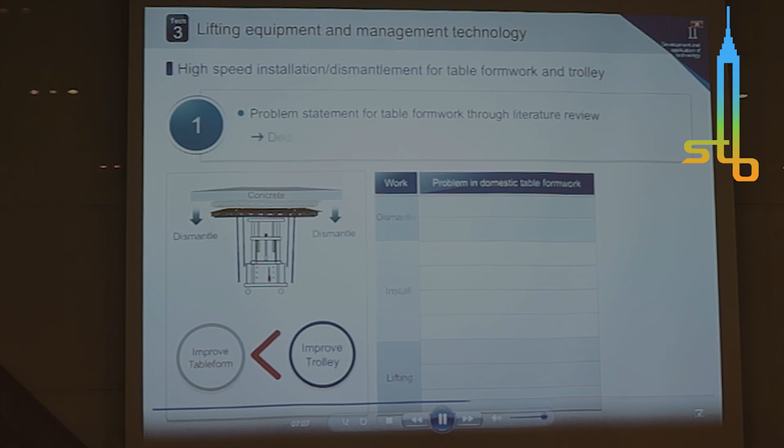In addition, development of a trolley for high-speed installation and dismantlement started. With consultation from domestic and global professionals, required performance improvements of the current table formwork were derived. Based on the deducted required performance improvements, the concept of the trolley equipment was developed. This trolley equipment will be a unique domestic technology, including a tilting sensor, fixing unit, hydraulic electric device, and driving motor.

This technology is an automatic lifting technology for table form lifting. Problems with current lifting were analyzed, and the correlation between required performance and characteristics of technology was analyzed. Consequentially, improvements were identified in guide rail operation, table fixing method, and door opening.

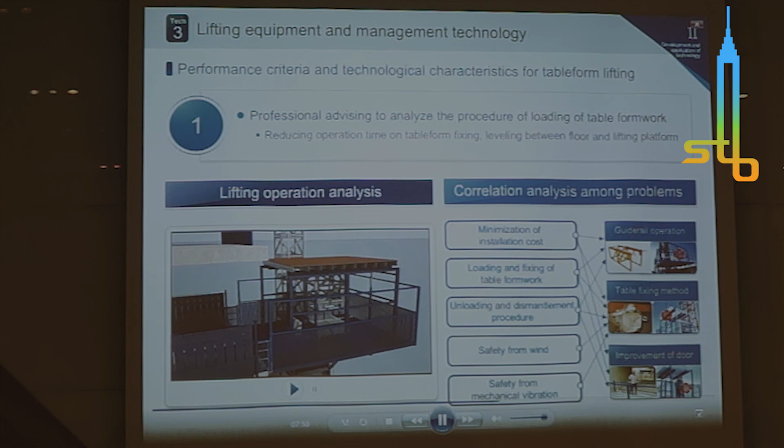In order to meet all the requirements, an extended door type of two-way guide rail operation process was designed to solve the problems with step pulley and table form lifting operation. Currently, a prototype has been made and experimental tower testing was performed. The prototype of this technology will be designed and applied in the field this October.

Here are six major tasks of the center. The first task is establishment of the center and discovery of future specialized tasks. The center plays the role of the control tower and think tank of super tall buildings. For securing growth power for the future, cutting-edge research projects are consistently planned.

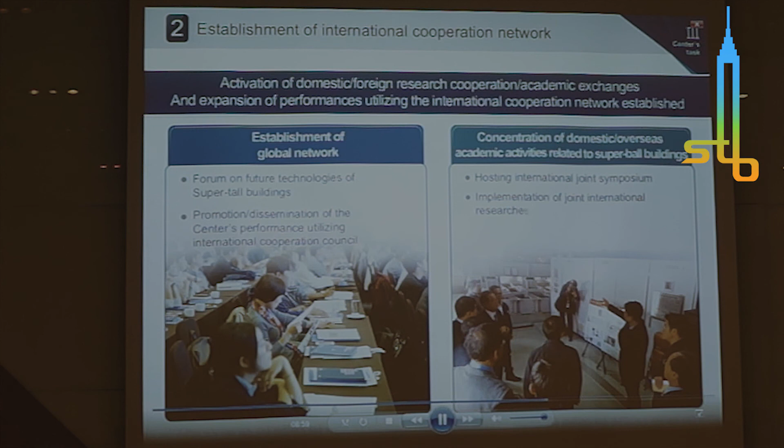The second task is establishment of an international cooperation network. A domestic hub with the World Super Tall Building Association, CTBUH, was developed, and active academic exchange with University of Notre Dame, University of Michigan, Tokyo Institute of Technology, Kyoto University, Tsinghua University, Tongji University, and Tamkang University formed consultative network groups related to super tall buildings.

The third task is establishment of a global business support system. As an organization for supporting global business, education on developed technologies will be provided, and global expansion of companies and pre-occupancy of the global market will be actively supported.

The fourth task is development of a training program for fostering global workforce. In order to educate the global workforce on seismic fields for super tall buildings integrated with ICT, the university made a contract with small businesses, and a degree course supported by the Small and Medium Business Administration was established to re-educate employees according to company demands at Dankook University. With this re-education, professionals will be trained every year.

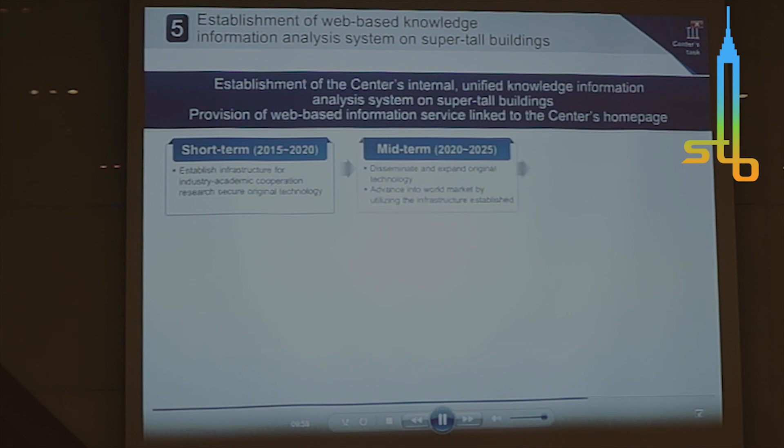The fifth task is establishment of a web-based knowledge information analysis system on super tall buildings. The center established an internal and unified knowledge information analysis system on super tall buildings, and information service with the hub will be provided through management and advertisement of research, and supervision of technologies, industry, policy, and research trend analysis.

The sixth task is identification of improvement of the law regime for super tall buildings. Instead of short-term review, laws related to the actual problems with super tall buildings in each phase were inspected. International operation examples are investigated to propose mid-long-term and comprehensive law regime improvements.

The establishment of the super tall building center and its major tasks were introduced, along with several reported outcomes of developed technologies from broadcasters and newspapers. In April 2016, Issue Maker magazine reported the establishment of the super tall building center at Dankook University. The center will be a significant medium proposing direction for successful Korean industry. In 10 years, this center will have the foundation to be independent, and domestic companies will have an important hub providing opportunity to reach out to the global construction market.

In order to support overseas advancement of specialized construction companies, foster super tall building specialists, and excavate energy-efficient technologies, an MOU with specialized companies was executed. Also, effort has been made to accomplish the tasks of the center.

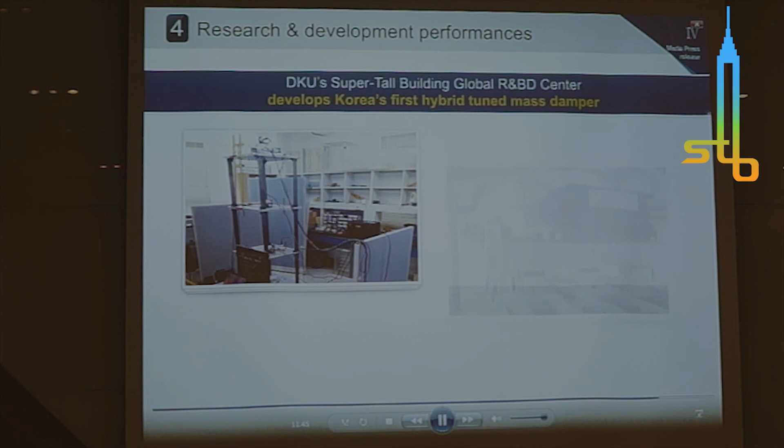For application of optimized vibration control devices depending on building location and characteristics, hybrid tuned mass dampers, control devices with multiple axes and modes, and active control systems were continuously developed.

Currently, the BIM market is 100% dependent on overseas technologies. Successful software development from venture business Changsoft and Dankook University was reported, with the software being an ignition of changing the paradigm of global construction technologies. In October 2016, the director of the center, Chung, received the grand prize of the Seoul Construction Award from Seoul City Hall.

Chung evaluated the seismic performance of old houses and super tall buildings and established countermeasures. His contributions to increasing the safety and value of buildings were recognized, and he was the only one selected from the architecture field. Outcomes of the Super Tall Building Center for the last year were briefly introduced.

We will not stop here, but will actively support and spare no effort to become the world's leading Super Tall Building Center. Our technologies make your dreams come true. Just imagine it coming true with our technologies. Thank you for your attention.